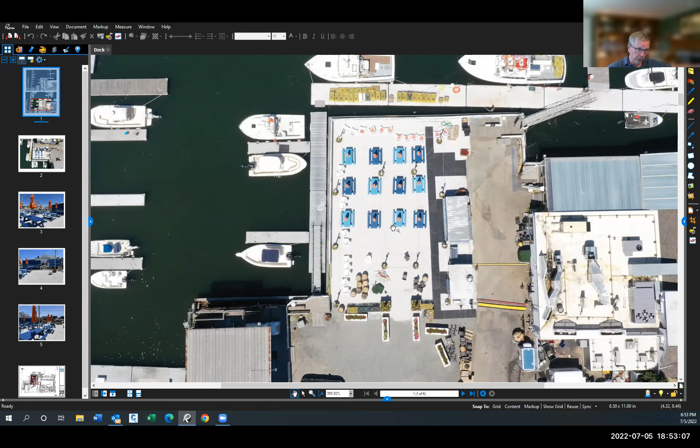This here is another aerial image of the same thing, a little closer up now, more perspective. There's the food truck, there's the container with the bar, here are the picnic tables, Adirondack chairs. There's some barrels here, and then there's string lights here, held up on posts that are in planter buckets.

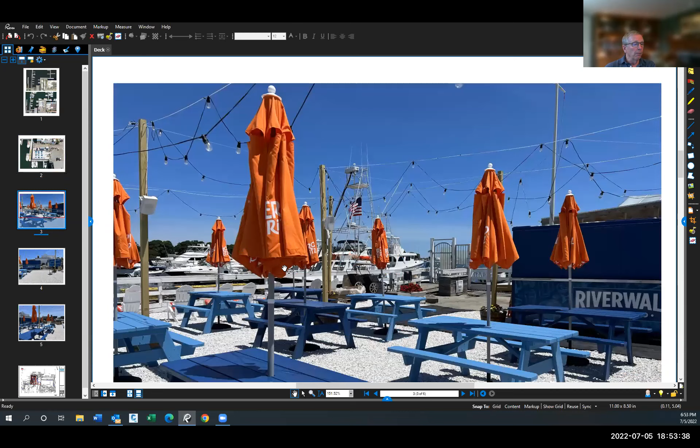So here's a ground shot. Another ground shot. This shows here, here's the container, that's the bar, and then this is the food truck over here. Here are the light poles that are, as I said before, in the planter buckets with the string lights on them, and some barrels. And another photograph here.

And then lastly, what I have is just a site plan. I don't know if you want to get into this, be happy to do if you want, but we did file a notice of intent. Talked with Julia about this. We filed it on Friday, just to cover the bases. Would this have been an RDA or not?

We just did the NOI because we were eager to get occupancy, assuming this can get approved sooner than later, rather than risk the positive determination and lose a couple weeks, then having to go back and file the NOI. We took the conservative approach, filed the NOI. It went on Friday morning, and presumably we're on the agenda in two weeks.

And that's it. I can go back through the visuals. I don't know, Chris, if you've got anything you wanted to add. Yeah, I guess I wanted to mention Amy Scarpello from Tuscan is also on.

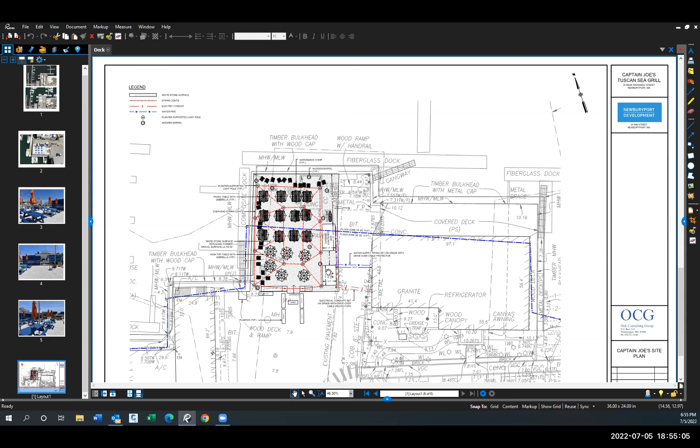Yep, and she, okay, so if there are operational questions, Amy could answer any of those operational questions. Yes, I'm here.

Okay, well, I guess appreciate the update here, but you filed a notice of intent, so I guess we're gonna be spending some time looking at all of that too. I don't know if anybody else from the commission has some questions before we take a look at that or not.

I had asked earlier about, even though it's not within our actual jurisdiction, the question about the Chapter 91 approval. And I was hoping to look at that and get a better understanding of whether you have approval to do this.

This is Chris. Our attorneys have looked at that, and they can provide something for that. They have evaluated that it is in compliance. And again, I'm not a lawyer, so I don't know the specifics around it, but we can put something together for that based on their review.

Okay, yeah, and then in the notice of intent, I assume it would be forwarded to DEP, and they probably will send it to Waterways. So it would probably be a good idea to send such information to them as well to expedite this.

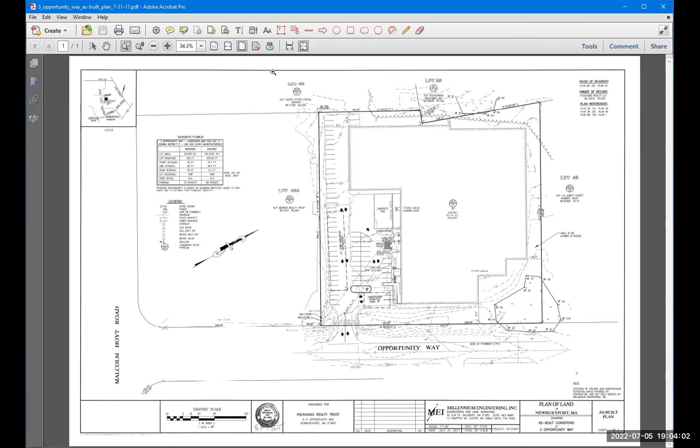I can bring the plan up and quickly go through the request before you tonight. We have the plan here if you want to speak to that. Okay, I have a video as well, I can show that afterwards. But the request before you tonight is in regards to 3 Opportunity Way. It's packaging specialties, a commercial development that was done quite a while ago, over 5 years now.

There was an addition constructed on the street side of the building, the main bump out closest to the road. You can see the wetland to the right, bottom corner. Millennium went out in 2017 and did an as-built on it, which is essentially the plan you're looking at today, and found that the main structure and the associated work relative to the parking area was all done in reasonable conformance with the original design plans.

What I found out more recently in working with Julia, your agent, is that there was also a planting plan that's on Millennium's border which we didn't actually do, and I didn't catch it. I was unaware there was a planting plan that was part of this. So my letter, which states that everything is done in close, reasonable conformance with no major deviations, is out of date because we just found out about the plantings on the street side and running between the wetland and the building and up the right-hand side of the property.

I've spoken with Gary Swirling, the owner of the property, and he's indicated that all the plantings along the roadside in front of that bump out there have been installed, and that's the video I have, I can show you. But the plantings between the wetland and that front yard area on the right-hand corner, and running up the side, he was unaware of as well. So I've spoken to him about that. He has a landscape gentleman who is going to count up the number of plantings needed there and come up with a proposal to have those installed as soon as possible.

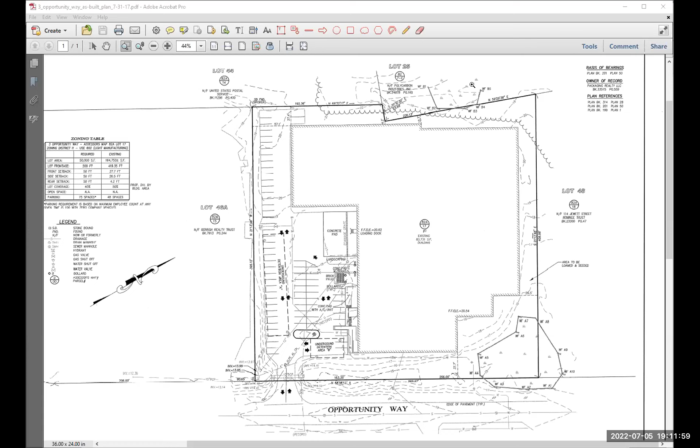Anybody else? I'll make a motion to issue a partial certificate of compliance. A second? Okay.

Andy, can I have Charlie vote on this? Yes, he did not have to participate in the original permitting to act at this time, if that's the question. Right, okay.

All right, roll call. Charlie Alovisetti, present, yes or no? Yes. Dan Warshaw, yes. Carol Wagon, yes. Steve Moore, yes. David Vine, yes. And I vote yes.

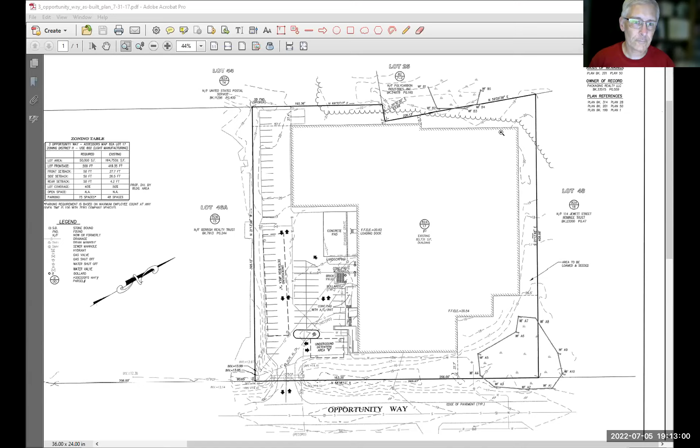All right, next item. Can I get a motion to open the public hearings? So moved. Second. All right, roll call. Steve Moore, yes. Dan Warshaw, yes. David Vine, yes. Carol Wagon, yes. Charlie Lovisetti, yes. And I vote yes.

Charlie, we open up public hearings because it's actually a hearing, where the previous items are not a hearing. The public can comment on the hearing items. All right, first item on the agenda is Robin Wallace, 4 79th Street, notice of intent.

Carol, were you going to make a statement regarding this? Well, I think what I should do is just vote present. I don't want to take a position on this because I know Robin quite well.

This is Andy, if I could - typically the indication is given by a board member by just recusing oneself for the record, and that's sufficient. Okay, I recuse myself then.

Thank you. Do you want me to leave for the discussion? Probably should at least shut your camera off and your audio. Okay. All right, so we have Devin and Lisa Mead and Joseph Cohen.

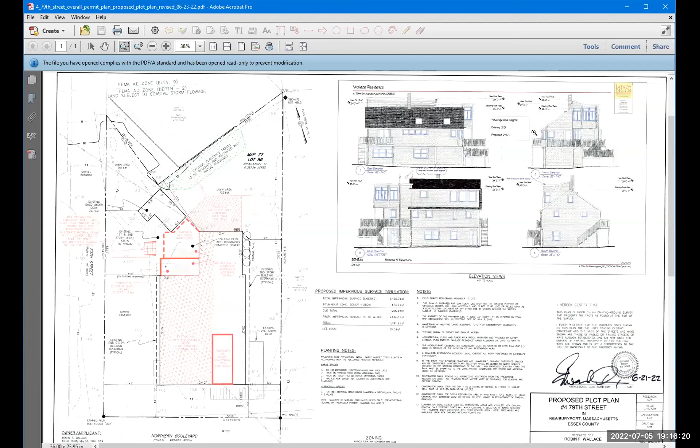So with that being said, I know the commission had some concerns about the depiction of the elevator. We're hoping these plans in front of you today, dated 6/21/22 and updated, which have also been provided to DEP, are available to you. I'm not sure if Lisa wants to take it from here, but I'd be open to any questions the commission might have after review of the waiver request and other supplemental materials we provided.

Thank you, Devin. Mr. Chair, can you hear me today? I'm having some technology problems on my end too. Yeah, no, you're fine.

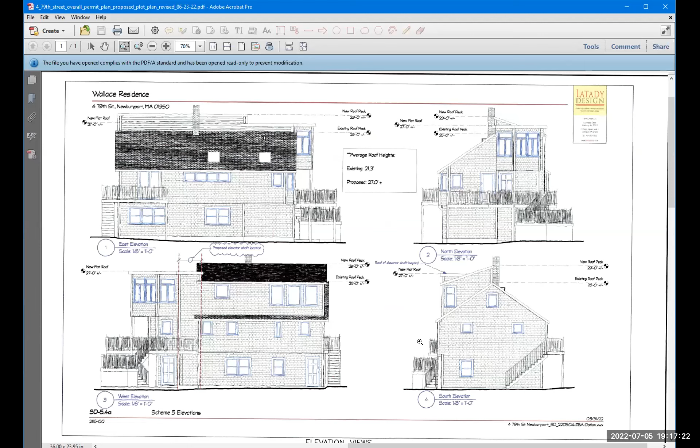Okay, so I just want to point out on the plan in front of you, which Devin indicated, a couple of commissioners wanted to more clearly depict where the elevator was. You can see on the elevation on the lower left-hand side, the west elevation, not the site plan, the elevation—well, you can see it in both locations. So you can see how Devin called out the proposed elevator area.

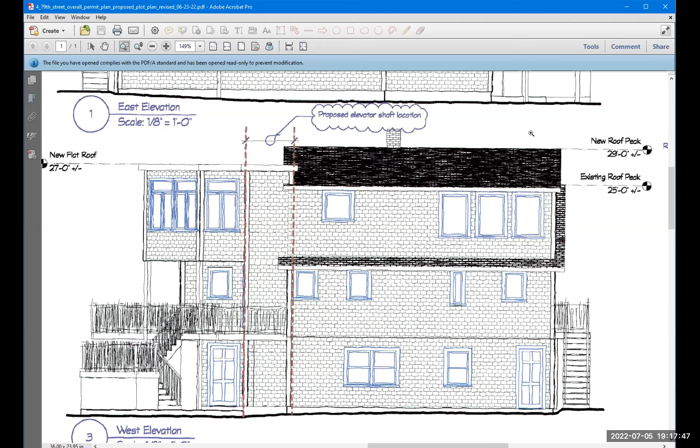So you can more easily see how you would enter onto the existing deck at that bottom door via the ramp you saw on the site plan, and then take an immediate turn into the elevator, where you can see the proposed elevator shaft. If you go back to the site plan, please, Andy—you can see where you go onto the decking and then into the elevator, which again is pointed out as the proposed elevator shaft hallway, floors 1, 2, and 3.

You can see that also on these plans, which I think needed to be pointed out. I also want to include the information I provided to the commission and the chair earlier. There was a question about the pit. There's essentially no pit for this elevator—it's a pitless elevator. The clearance required underneath is just to make sure there's nothing under there.

In this instance, there's actually a hole that's going to be cut in the deck, and there's existing bituminous already underneath the deck, about 24 inches below that. So there's already an area between the deck, where the first floor of the elevator opens up, and the bituminous—so no pit will be required because the separation is already there. And as Devin indicated, the mechanicals are at the top and it attaches to the sidewall.

If I could also advise the board, the Zoning Board of Appeals did approve the variance for the third floor living space, as well as a special permit to modify the pre-existing non-conforming structure, at their meeting shortly after our last meeting here on June 8th. I think their meeting was the next week. So the zoning board has approved those permits.

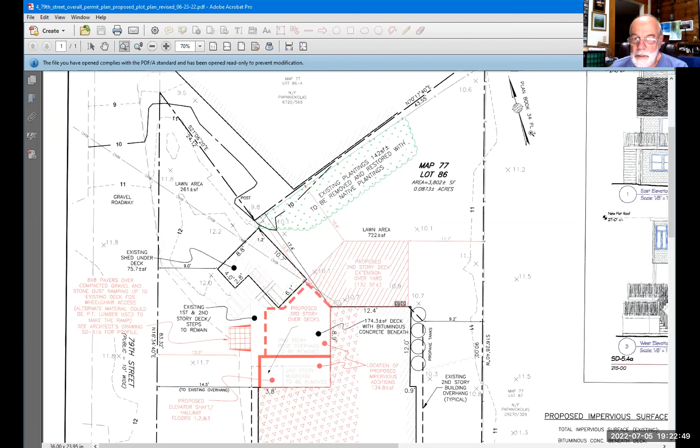I think, Andy, if you could bring up the appraisal, the first page has a pretty good picture of the house. Yeah, just a moment, let me pull that up. Steve, if I could answer the question while he's doing that - if you can see this heavy red line here right above the 3.8, that's the existing edge of the house. Okay, and then there's a deck.

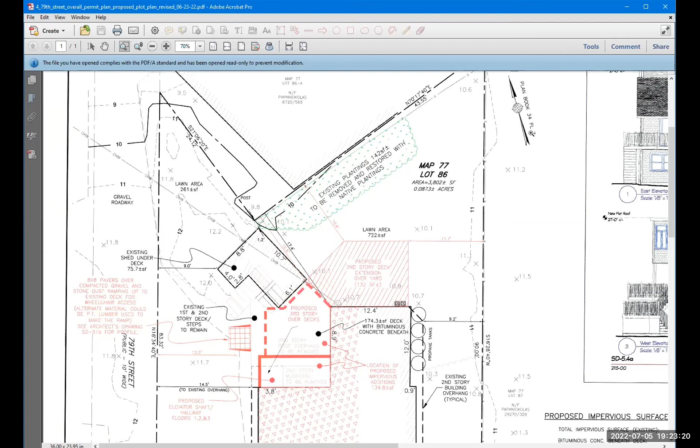And so the addition is that heavy red line in which the elevator and entry to the elevator will be located. So in this picture, that wall of the building is still there, and the elevator shaft is to the left of it. That's correct, and the opening. Does it come out to that post that's supporting the upstairs deck? No, it's not that wide. Okay, that answers my question as to what was what.

Okay. Do we have anything else? Any other questions?

If we could just look on the plan and see where I think there was some mitigation planting, I don't remember where it was. It is 142 square feet of existing non-native plantings that are going to be removed and then restored with native plantings, which I think will enhance that area quite nicely. Those are all listed on the plan in detail, as they are in Devin's submissions.

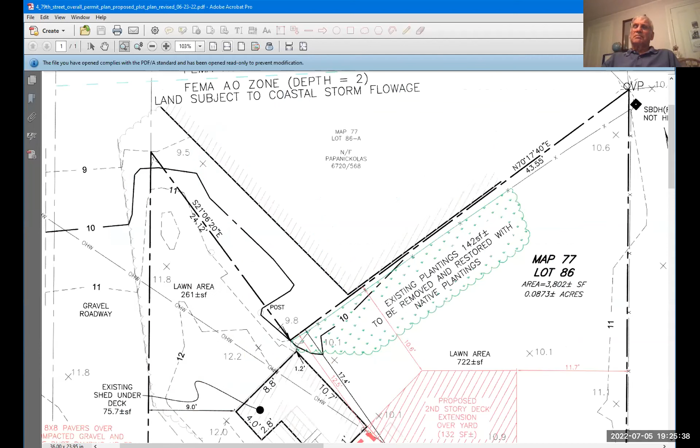Now, I'm not remembering, are we supposed to vote on the variance now, or do we just close the hearing and vote on it later? My recollection, Mr. Chair, was you typically would vote on the order and the variance and then do your discussion about those things later. Well, generally what we do is we close the hearing.

So I just want to know since I can't remember, Andy? Sure, procedurally I would close the hearing, then vote on granting the variance and waiver, and then go right to the final decision from there, or whatever else might be included in the commission's decision. Okay, so just close the hearing now. Correct, unless the commission feels additional information is needed.

Okay, so what do you want to do? I'll move to close the hearing. Second. All right, roll call. Charlie Alvacetti - Mr. Chair, yes. Lisa, I just wanted to remind the chair that Mr. Alvacetti wasn't present at the last meeting. Oh right, he can't be part of the closing of this. I'm getting my different parts messed up here.

All right, we'll start this again. Roll call: Paul Steve Moore, yes. Dan Warshaw, yes. David Vine - did I get a yes? I think you're frozen, David. No, I... are you back? You're kind of back now. Okay, well, I vote yes. And I vote yes. Dan, I asked you, right? Can't remember. You did, yes, and I voted yes.

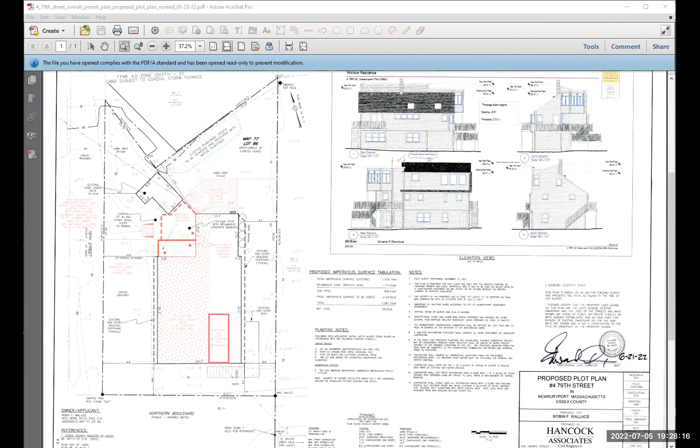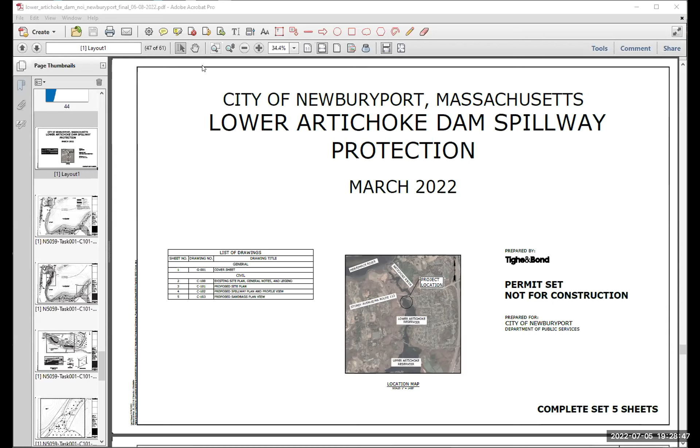I'm only here for intros and any questions you might have after our consultant speaks. We have on board Tracy Adamski, a senior VP, who has been the project manager since inception. They updated our watershed protection plan to address climate change, finishing in September 2021. This particular project started permitting to protect our lower Artichoke Dam and our water supply.

We submitted a notice of intent with West Newbury Concom in August of 2020. We made some revisions internally, which she'll address, and that triggered more square footage of impact areas. So we had to launch a MEPA permitting process, water quality cert, the whole nine yards. She'll touch upon that, so that's why we're in front of you.

Many of you members attended the commission meeting in West Newbury last week, thank you very much. This project, as you already know, and mainly I'm saying this for the public, is really to protect our lower Artichoke Dam because the existing spillway is 3 feet lower than the current 100-year flood elevation. So our goal is simply to request a permit from you folks and West Newbury.

We want to put in washed stone, fairly large stone, 4 to 6 inch, some might be 8, to form the foundation so that if there's a hurricane predicted or a surge predicted, we can come in and put in some sandbags. On that note, Tracy, I'll turn it over to Tracy Adamski. She can take it from there and I'll be available for any questions.

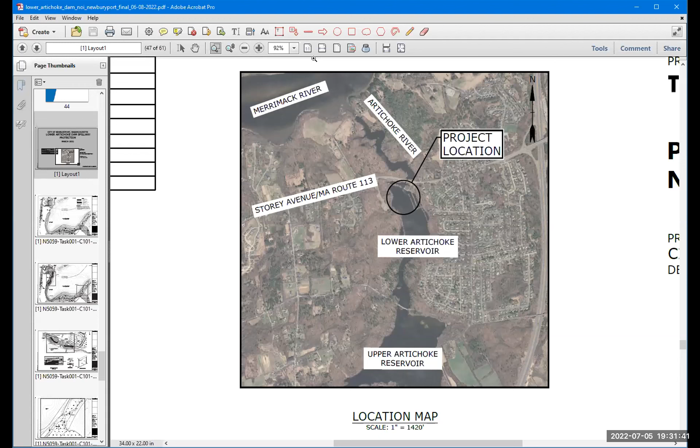There is one raw water intake, located approximately where that project location points to, near the lower Artichoke Reservoir and the spillway, about 100 or so feet east of the lower Artichoke spillway. As John Eric mentioned, that spillway happens to be 3 feet below the current FEMA mapped 100-year flood zone, which is mapped at elevation 12. The remainder of the embankment for the lower Artichoke River is at or slightly above elevation 12.

So the concern here, confirmed through some modeling that was performed, is that the lower Artichoke is susceptible to a backwater event, with flooding from the Merrimack River coming up the Artichoke River and flowing over that spillway into the lower Artichoke Reservoir. With that, it would bring brackish water and other pollutants that the city's water treatment plant is not designed to handle.

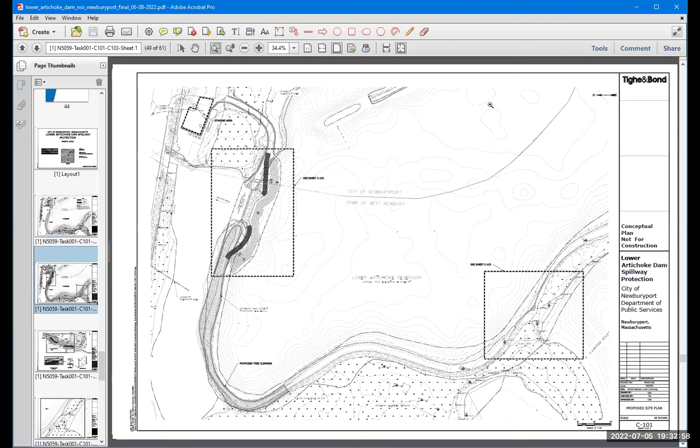So the goal here is to provide a temporary solution so that in the event of an emergency, a Henri coming up the coast, or another large storm with potential for this backwater event, the city would be able to come in and install some protective device to prevent the water from backflowing over the spillway here. So, thank you.

This here is the project. It involves construction of a foundation, shown here in the stone adjacent to the spillway. And as part of that foundation, there needs to be side slopes and access to it.

That foundation would be at the elevation of the crest of the spillway, and that would provide the city with the option of coming in and putting in super sacks, so large sandbags, before a predicted event, so that there was some protective measures for the reservoir.

As you can see, there's a line right about where the leader says sheet C102. That's the town line between the town of West Newbury and the city of Newburyport. Previously we were only looking at having a very small foundation right at the spillway, but in further discussions and as we looked at other options with the city, it became clear that the city needs to have easy access here. Having ramps for the city to drive onto, to put these materials onto the foundation to protect the reservoir was important. So that's where our impacts expanded across the town line into the town of West Newbury as well.

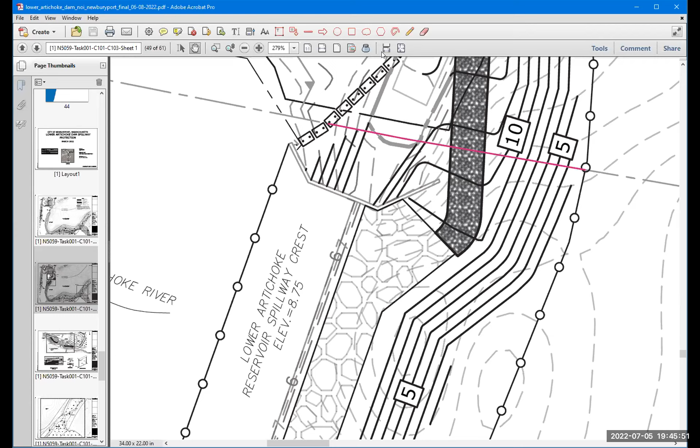Okay, I have an image. If you want me to share my screen, I can show that to you. Yeah, that would be good. Okay.

Can I get... you know how to do that? No, I'm looking to see if I have the okay to do that. There should be a button at the bottom of your screen that says share screen. I don't see it, I just see mute and raise hand. I think she has to be made a co-host or promoted to a panelist in order to share. Okay, got it. These are materials not submitted before the meeting. All right, thank you.

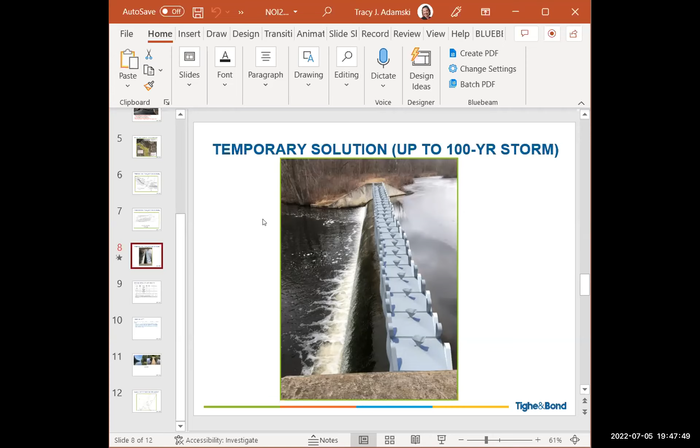While she's looking for that, it's important for the commission to understand this is primarily for a backwater event, not a surge. You get a coastal storm surge, that's easily comprehensible, you can visually see that. But usually hurricanes have inland rainfall events too, so the combination of the two means water may be rising at the same elevations on both sides. What you see in front of you is just a graphic setup, a sandbag image grabbed from a catalog. It's not going to look exact like that, but you get the idea. In our case, the left side of this vantage point is where the water's coming from. This picture shows water on the right, which may rise in a combination of coastal and inland storm, to be determined. But if it's a purely backwater event from storm surge, it's going to be coming from the left. So that's what this is all about.

So John Eric, assuming you put these things in place and they're there for a couple of days before you decide you don't need them, or the storm passes, you've got water backing up behind it that normally would be going over the spillway. What happens if that gets to a depth where it's flowing over the super sacks? Yep, so, I'm sorry to interrupt. No, go ahead, I don't understand what would happen. Well, don't feel bad, because we have a rough idea, but the only thing we can provide is what we anticipate.

At the end of the day, we just have to monitor and see what's the best situation. The storm we're figuring would hit us is, to be honest, a combination of the two: high surge, but there's also going to be a rainfall event filling up the reservoir. There might be purely a surge event, that's fine. But to meet Steve's question about the rising reservoir, these super sacks need to go 3 feet higher. That means the water could be 3 feet higher on the upland side, which is the right side of this picture. When the water's on the left and the surge is the same elevation, it's pretty much equilibrium.

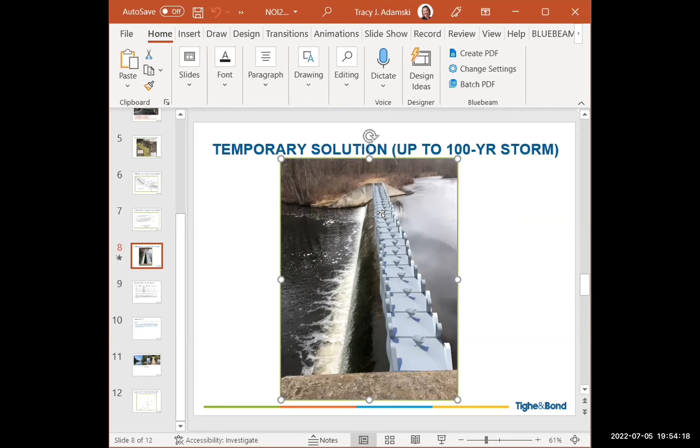Okay. All right. Do we have anything else on this?

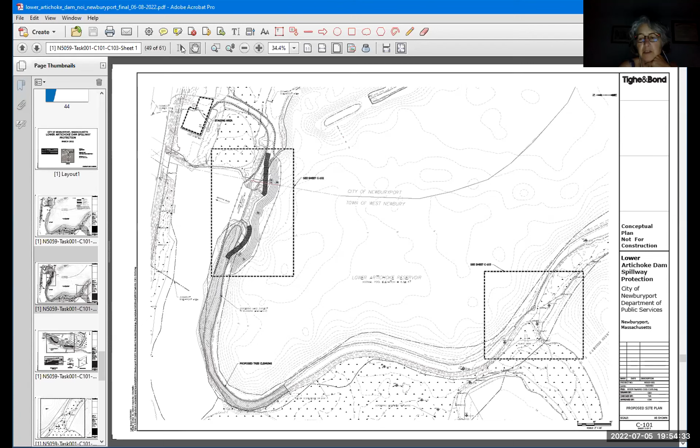Do we know, or are we allowed to know, what West Newbury decided the other night after their meeting? Can you clarify that? Tracy, I think you're better suited for the overall communication you've been having with them.

Sure. They have continued. They wanted a site walk, and that occurred Sunday, but they have not yet had a chance to walk the site. They walked over here near the spillway, but they have yet to walk over on the West Newbury side. So we're waiting for that to happen, and then we'll be in front of the commission again. So they have continued at this point.

Michelle Green, did you have anything to add? I know you raised your hand earlier. I'll say no.

Okay, go ahead. John, the super sacks will be filled and nearby, waiting to be administered.

Are they in a resource area? Right now, they're outside the resource area. They're behind the new access road for the West End easement, the West End sewer. It's over by the gravel access road, uphill from the pump station, a couple hundred feet away.

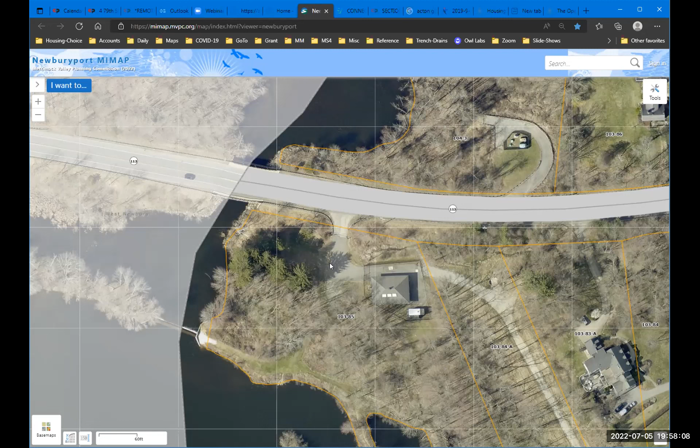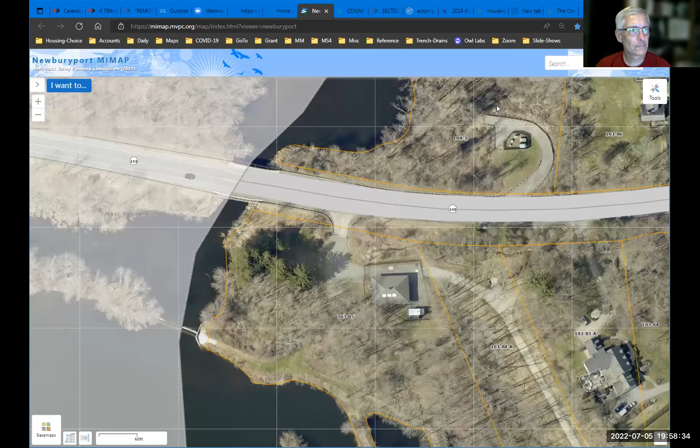All right. Anybody else, at least on the commission? All right, anybody from the public want to weigh in? Raise your digital hand if so. Okay, not seeing anything. What do we want to do?

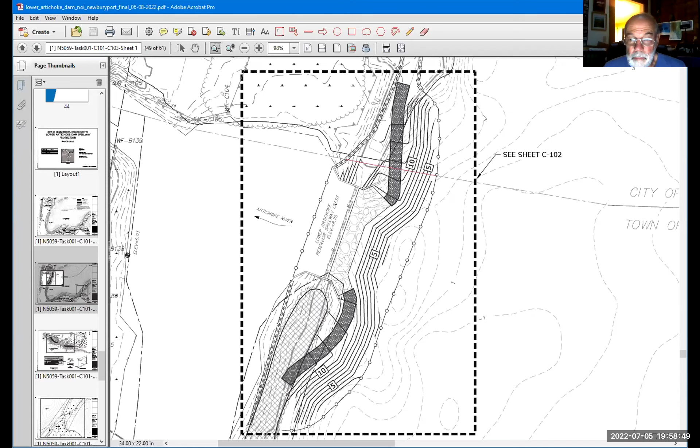I'll make a motion to close the public hearing. Second. Okay, let's see. Steve Moore, yes.

Dan Warshaw: Just wanted to make sure, what if there are any material changes pending West Newbury's continuation and their hearing? Do we want to close now, or wait and see? I don't see anything personally that would be a real issue, but just throwing it out there. Well, I'd guess they'd have to file for an amendment if there was something that big, that would change at least what happens in Newburyport. But we can decide.

Could we reopen if that happened? No, I don't think so. I think once we close it, most likely we're gonna vote on an order of conditions tonight.

John, Eric, Tracy, what's your view on us closing the public hearing tonight? I'm going to turn it over to Tracy for her professional opinion. Tracy: I'd say if there are any material changes, we would come back to you. There is a process for requesting an amended order of conditions if the material changes warrant that, or it could be considered a minor change allowable under the existing order of conditions. So there is a process for us to come back if there is a material change.

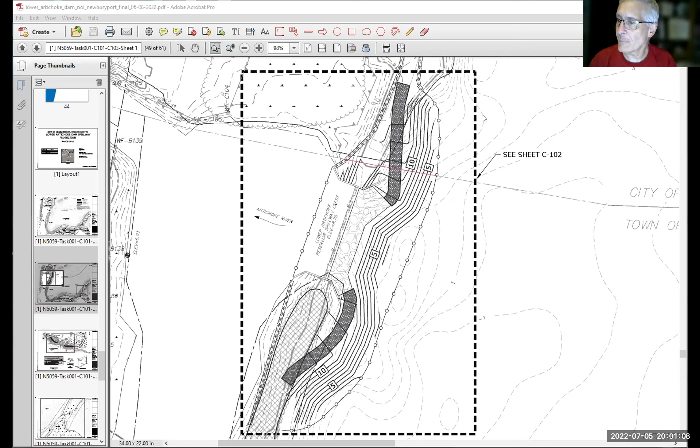Thank you, Commission. Thank you. Thank you, Tracy. Thank you. Sorry for the tardiness. No problem. You were here when we needed you.

All right, can I get a motion to close the public hearings? So moved. Second. Roll call. Steve Moore, yes. Dan Warshaw, yes. David Vine, yes. Carol Wagon, yes. Charlie Lovasetti, yes, and I vote yes.

All right, now we will go back to the City of Newburyport Central Waterfront Park improvements. This is Andy Port, acting as project manager for the city for this project. With us tonight to speak to this is Maren Braco, our project manager from Sasaki.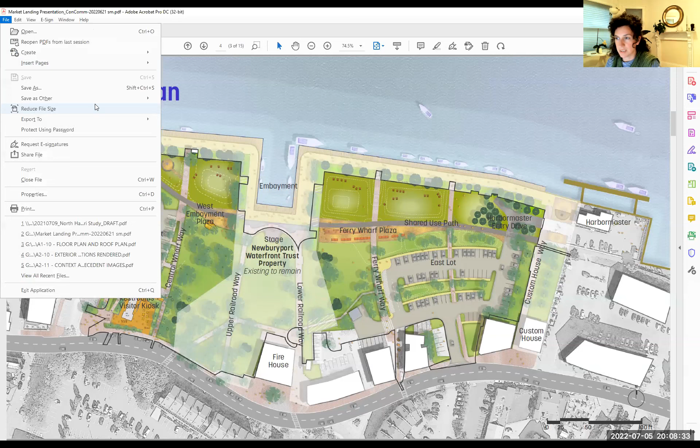So this is the proposed expanded waterfront park. With the new design, there's expanded green space, lawn and tree plantings. In terms of circulation, we've maintained the existing ways to the water and extended new ways to the water through Ferry Wharf Way and Central Wharf Way. We've also extended the city's rail trail through the shared use path going from the east, meeting the Waterfront Trust property at the boardwalk and then going to the west. Along that shared use path, we have a number of activation moments.

We have a picnic and hammock grove among the tree plantings at the edge. Ferry Wharf Plaza has tiered seating for social gathering, as well as swing structures that look out to the water. The West Embayment Plaza will be activated by a sculptural element created by a local artist. We've also been working with the city on an Indigenous Peoples place to create a passive, contemplative area within the park that can also hold events for that community. And finally, we have the visitor center and restroom facility, which Dan will speak to in more detail.

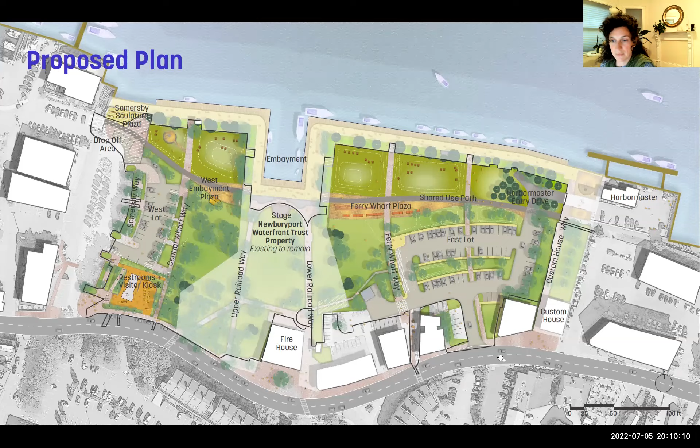To give you a sense of the principles driving the project in terms of programming, we want to create an active and inclusive destination that works throughout the seasons, embrace the character of Newburyport and the waterfront, connect this working waterfront to downtown, and from an environmental perspective, create a resilient and sustainable landscape.

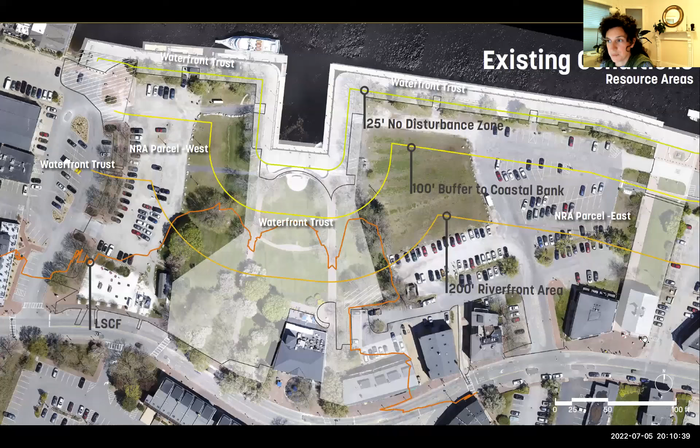And from here, I'll hand it over to Stephanie. Thanks, Maren. So just a little refresher on some of the background of the park.

It was created mainly through fill between the late 1800s and all the way up to the late 1960s. So it's relatively low lying. It was all previously developed even prior to becoming a park.

As Maren mentioned, the work is primarily located on the NRA Parcel West and NRA Parcel East, and doesn't really impact the Waterfront Trust parcel, which goes through the center of the project and also along all of the waterfront.

So the resource areas and buffer zones on the site that are jurisdictional under the Wetlands Protection Act and Newburyport's Wetlands Ordinance include buffer to coastal bank. It's approximately 49,000 square feet within the 100-foot buffer. There's about 123,000 square feet of impact to the 200-foot riverfront area.

And about 177,000 square feet of impacts to land subject to coastal storm flowage, which we delineated by placing the base flood elevation of 12 feet that's on the FIRM, actually on the topography of the project site. Next slide, please.

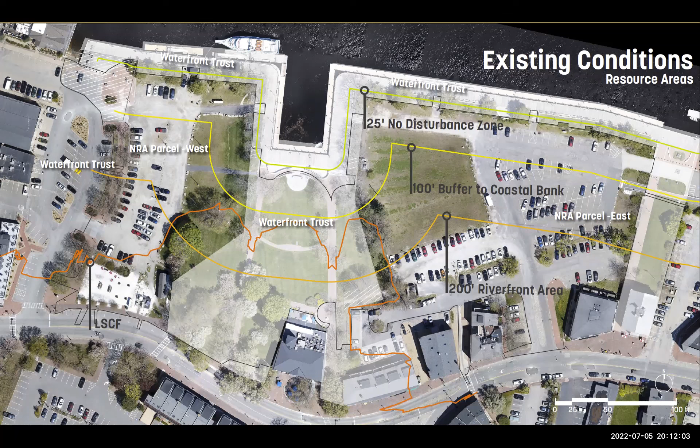So Maren went over basically the layout of the proposed park. Work within the resource areas will include demolition of the parking areas and the existing pathways. There'll be some limited tree removal. There'll be excavation of some contaminated soils.

There is an AUL on the site, and as the contaminated soils are encountered, they will be characterized and it'll be determined if they can be reused on site or if they need to be taken off site.

There'll be placement of fill, either from the excavate on the site or with clean fill, to actually raise the grades a bit, and that will improve resiliency. There'll be construction of new pathways and plazas and the other elements that Maren described to you earlier.

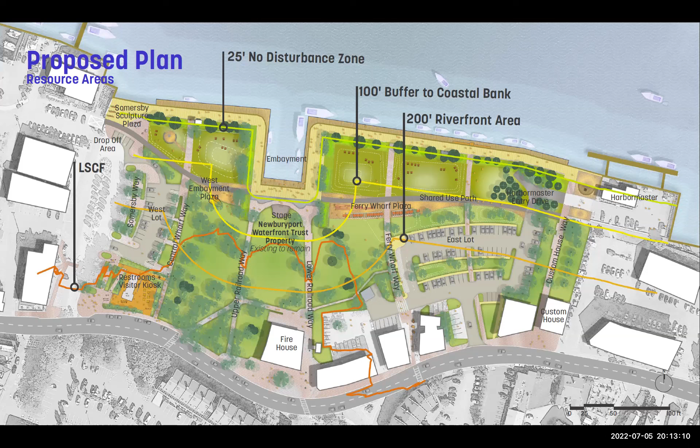There'll be replacement and addition of utilities. There'll be a whole new stormwater management system. The parking lot will be reconfigured and there'll be new landscaping, including new trees. Next slide, please.

Regarding the parking lot reconfiguration, this is where we're going to be reducing the amount of impervious cover on the site. They'll be replaced with smaller asphalt parking lots and they'll have granite curbs and concrete sidewalks associated with them. There'll be a decrease in impervious surface of at least 18,700 square feet.

As the design progresses, we're expecting that there could be some further reductions in the impervious cover. And this reduction will improve the functioning of LSCSF and the buffer zone. It'll be adding vegetated area, and that'll filter and slow stormwater before it enters the river, and it'll provide a rougher surface to slow the velocity of the coastal floodwaters.

And then the planting and landscaping installation will take over from the impervious coverage, and there'll be new trees and shrubs, new lawn, perennial planting areas, and then a small event lawn that will have some reinforced turf to allow vehicular access to the bike path for emergency vehicles and for dock vehicles.

As Maren mentioned, there's also the new visitor center. That's actually going to be constructed outside of all the resource areas, but nevertheless, it will be constructed resiliently, and Dan is now going to talk about some of the measures that will accomplish that.

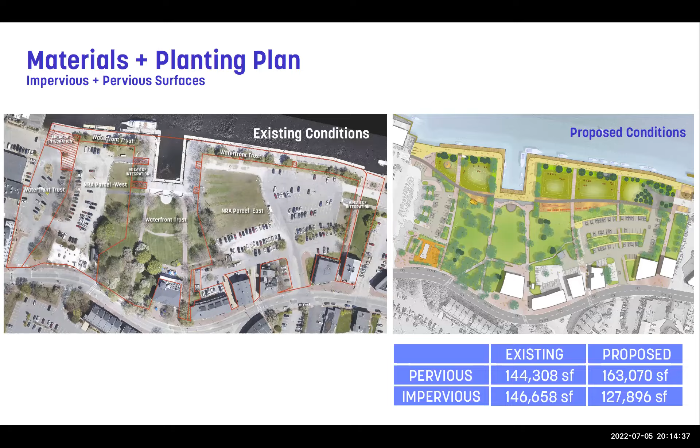Hi, good evening. So the visitor center and bathroom building is replacing the existing two structures. There's the existing bathroom building that has a men's and women's restroom, and then there's a small visitor center. It's over just to the right side of the slide, kind of under that text.

And so we're replacing with a new building, a new wood frame building with wood clapboard siding. The south end of the building, which is not marked on this plan, but the south end, the wider bit of the building, is the visitor center. It's about 230 square feet.

And then there's a small mechanical room with janitor's closet in the middle. And then there's 8 individual restrooms along the back side of the building on the 2 sides. This building is about 922 square feet at the moment.

And we currently have it located where you see it's drawn in gray. We're looking to move it towards the east where it's drawn in purple. And we're just in the process of doing that now to limit the amount of grading that we do.

So as Stephanie and Maren had said, the base flood elevation that we started with of elevation 12 is that marked FEMA AE zone. It's that sort of darker purple line that runs through the drawing. That's elevation 12, and we're setting our building at elevation 15.33, which is 40 inches above that elevation 12.

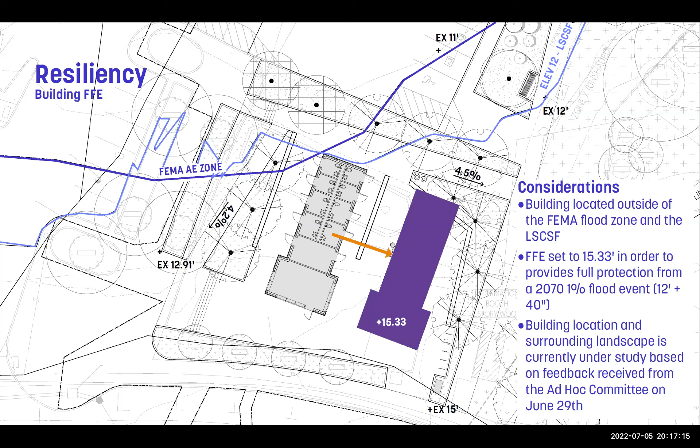Thanks, Andy, that's correct. So limiting the grading is the reason we're pushing the building back a little towards the east. Another thing we're introducing is that normally we might have made this a slab on grade building, just a small one-story building. But we're making it so there's a small crawl space underneath, with wood frame floor construction, similar to a small house that could be lifted in the future if need be, where a basement wall and wood frame floor and wall above are tied together so it can be lifted later.

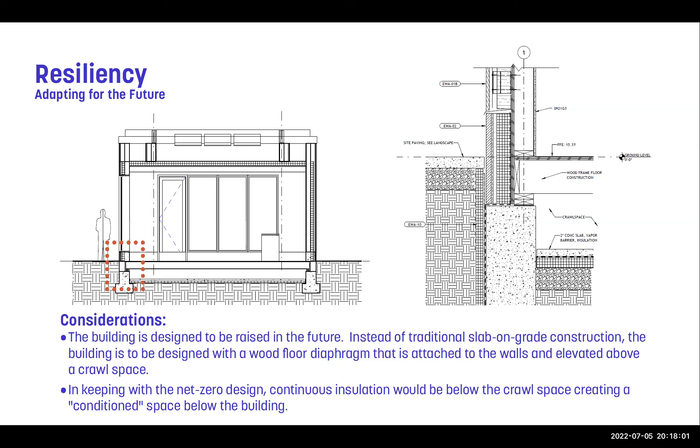Yeah, thank you, so we can open it up for questions now. Commissioners, you'll be seeing this formally as an NOI for the project, but we wanted to give you an informal review in advance to see if you had any questions or concerns, so we could elaborate on those areas in the filing if need be.

Just one little question. The shared use path you've indicated, what's that going to be made out of? That will be asphalt. We're using the same detail as the existing rail trail, so we'll make sure to match that pavement.

You indicated that this would be phased, and I was wondering if the whole project is going to be coming before us, and what kind of timeframe would you anticipate to complete all the work?

That's a great question, and Maren could probably better speak to it since on the city side we're dealing with the funding end of it. Sasaki's under contract to design the entire project. That's important for us looking at it from a project management perspective, to make sure the transitional areas make sense even if we do it in phases. For the commission's perspective, you get to see the whole product and how it relates to other areas.

But right now we're anticipating only having enough funding on our best track for construction of the park elements—the west and east embayment wings of the park, the shared use path, and the pedestrian ways, the newly named Central Wharf Way and Ferry Wharf Way extending out to the street more fully. Beyond that, other elements may be phased in. Some site elements, like swing sets and site furnishings, might be donated. The visitor center element will come at a later point because we're hoping for additional outside funding, federal or state, related to infrastructure, tourism, or other sources, but it will not be CPA related.

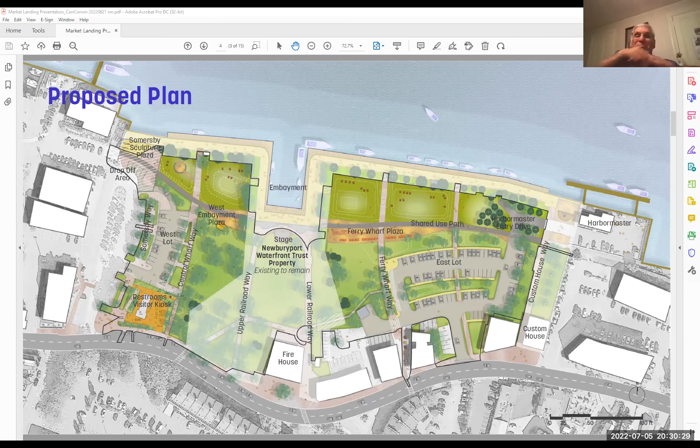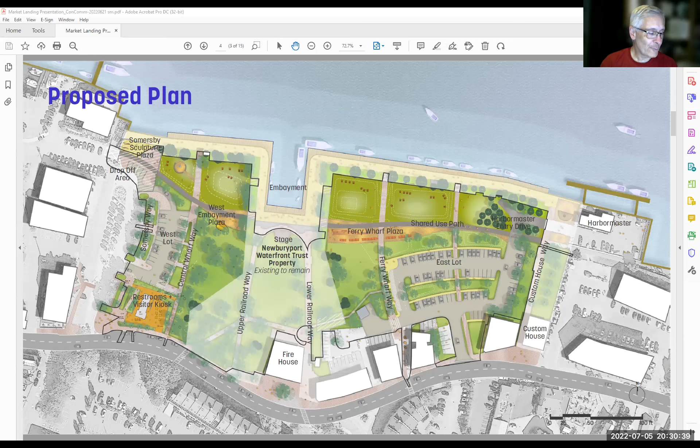I know one other thing that's not on here that we need to do, mentioned in passing, is we need a member for the Community Preservation Committee since Paul is retired. Is there anybody interested in serving on the CPC? And if anybody needs me to speak to what the commission does or how frequently it meets, just let me know, I'm happy to elaborate.

Do it right now. You don't have to attend quite as many meetings as the Conservation Commission, which is regular, twice a monthly because of all the permits happening around the city. The CPC, although it's nice to attend every monthly meeting, most important is they have a required public hearing at the end of the year to get feedback from the community. Most importantly, in the spring, basically March/April timeframe, once yearly, they look at applications for CPA funding, typically recommended once a year on a regular grant cycle.

All the local surcharge and state matching funds set aside for CPA purposes—historic preservation, open space and recreation, and affordable housing—the Preservation Committee provides an advisory recommendation to the City Council. The City Council then decides whether to appropriate the funds in accordance with that recommendation. Most projects will typically be approved in the order of business, but the CPC has to provide that recommendation relative to any grants that come in. Sometimes they're recommended for less funding or no funding, sometimes withdrawn. So you meet a couple times a year, a really important timeframe in the spring, and then later the rest of the year. Every once in a while there's an application out of cycle.